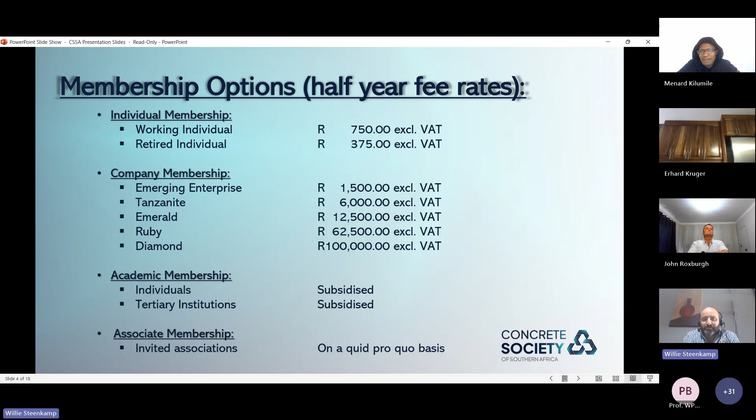Sorry guys, I just can't get my... I just can't get it to forward. Oh, there we go. Okay, cool.

All right, so I just want to start by saying this is a very low-level presentation on concrete rheology. At the end of this, the few slides I've put together, I just want you to have a feel for concrete rheology, and I want you to start linking the tests we do on fresh concrete with the rheological parameters in concrete rheology.

I've based this presentation on a chapter in this book called Advanced Concrete Technology. It's a chapter written by Dr. Peter Domone, and it gives a lovely walkthrough of our consideration of concrete rheology, considering the single point tests that we do on concrete, then a quick and brief description of the concrete rheology curve, and then we'll talk a little bit about the machinery or apparatuses that measure concrete rheology. Let's hope this works now.

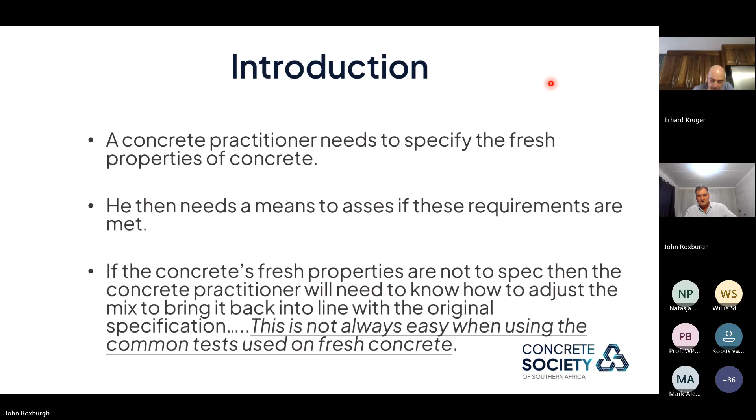Sorry guys, I'm having endless problems with this. Okay, I'll just use the enter key to get it to go forward.

So some of the basic requirements of fresh concrete: we must be able to place and compact it easily. So normal conventional concrete, we don't want to flow - that's a thing we really want to avoid. Using a poker vibrator to flow the concrete is a no-no, you get segregation. So we want it to just be able to flow a little bit around the reinforcement into the corners of the shutters, and hold together while it's doing that.

It must remain homogeneous with little segregation, and included in that segregation, it mustn't bleed too much. In some cases we do want it to bleed a little bit - for example, in an industrial floor, you want it to bleed a little bit. So when we're placing, transporting and compacting it, we don't want that mix to fall apart. We've got to design that into the fresh properties of concrete.

And then, of course, we want a good off-shutter finish, and we must be able to work the surface - for example, in industrial floors, work the surface easily and get the right finish on the floor.

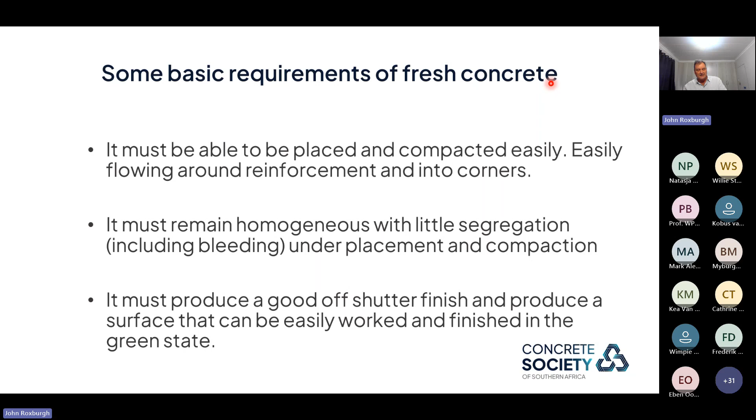And then this is when the contractors have a heart attack, because once the concrete is mixed, we've got a very, very short time to get that concrete transported, placed, compacted and finished off. Its fresh properties are constantly changing from the time it's mixed. People don't understand that the second you add water to your concrete mix, the second the water touches the cement, it actually starts hydrating. Then the rheological properties of that concrete, the fresh properties, start changing because of that. It starts very slowly in the beginning, but it is actually hydrating.

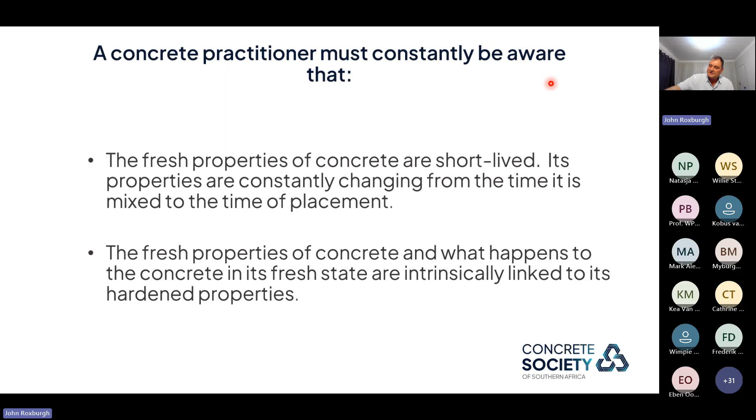It's very important to understand that what we do to the concrete in the fresh state is very closely linked to how well the concrete's going to turn out, how strong it's going to be, how durable it's going to be, and how well it's finished. So it's a very important part of concrete technology, the fresh state of concrete.

There was this guy, Professor G.H. Tattersall. He's renowned as the pioneer in concrete rheology. He wrote a very good book that used to be in the Institute's library, called Workability and Quality Control of Concrete. He was also instrumental in designing what I'll describe later as the Tattersall two-point testing apparatus.

So he proposed 3 different workability classes. Class 1, qualitative, where we just describe the mix using words. Class 2, a quantitative empirical class, which is the common test we do on fresh concrete.

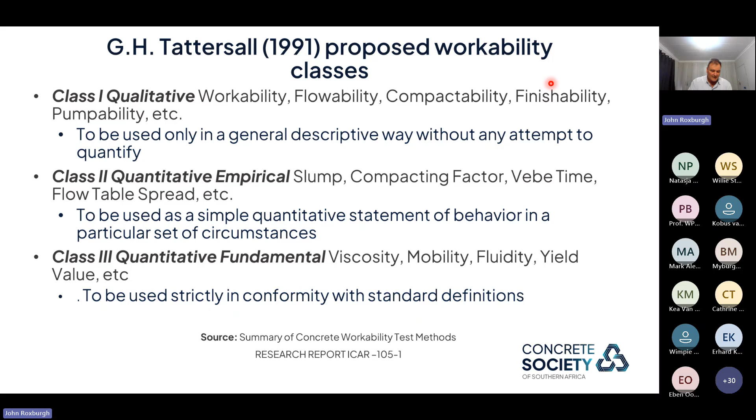We do a test and we get a value for it. For example, slump, we get millimeters, Vebe time, we get seconds. The third class is quantitative fundamental, which describes the concrete in terms of rheology, using the standard definitions you'd find in national standards for rheology.

The class 1 qualitative is basically the eyeball method. So the person observing the mix decides if it's suitable using his eyeballs and his brains.

The eyeball mix design is often used in the mix design process. In fact, my experience is a lot of the laboratories around the country don't do any fancy mix design process. They use what we call an eyeball mix design process. Through experience, they put the constituents together. They roughly know how much of each material needs to be put in, and then they use their eyes and brains to decide if it's workable enough, if it's flowable enough, etc.

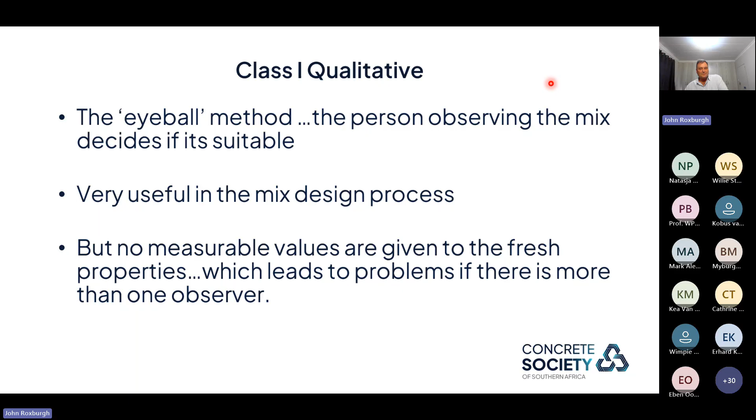But no measurable values are given to the fresh properties. So let's say you've mixed your concrete at the ready mix plant, and the guy looks at it and says, 'Yeah, no, that's great, it's got the right workability.' When it arrives on site, there's a second observer. That observer has to have the same meeting of minds as the guy at the ready mix plant, and rarely will you get that. So there's a problem with that—there's no measurable way of saying if it's right or not.

Whereas with the class 2 quantitative empirical description, simple tests are done on the fresh concrete and they yield a single quantitative empirical value. So we refer to these as single point tests—you get one value coming out of these tests. There are about, I think the last time I counted, about 33 different tests you can do on fresh concrete to give an indication of the workability.

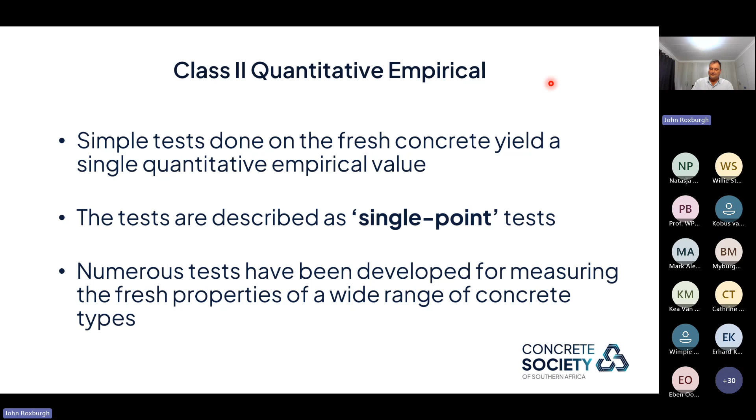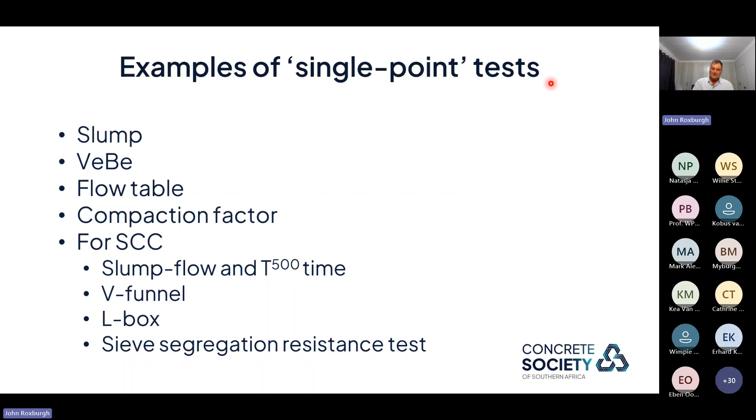So what we'll do is go through a few of them and have a look at what they're measuring. There's a list of some of the tests, so I'll go through some of the more common ones and we can see what they do.

The one that we all know is the slump test. In that diagram, it gives a lovely convex shape of the slump—that looks like a true slump, and that's what a slump should look like when you do a slump test. Unfortunately, when we do slump tests, we often see that half the concrete is sheared away or there's a total collapse, and we still measure the slump, which is not really the right thing to do.

The slump test is a wonderful thing. It's not going to measure workability, but it gives you an idea, and it's universally used, with very simple equipment to carry around. Most of our concrete is specified to have a certain slump, so when it arrives on site, they can do a slump test and send back the concrete if it's not correct.

Some of the problems with the slump test are very, very low precision of results. In other words, it's both inaccurate, but also repeating the test gives you very different results all the time. So it's very operator sensitive as well. We've learned how to work with it, but it's not the most accurate and precise way of measuring.

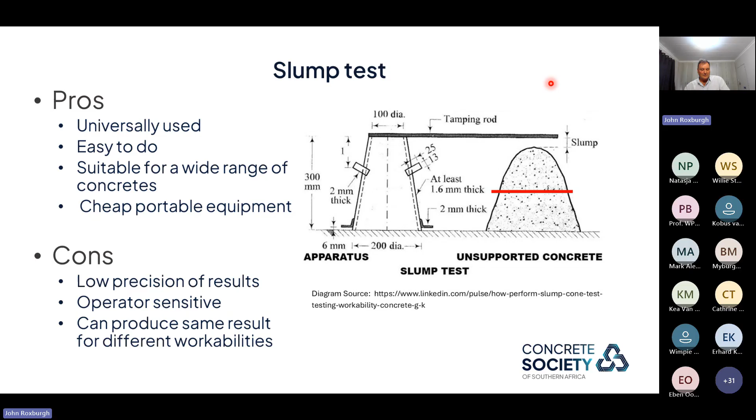What's really happening, in rheology we're going to be talking about the yield stress and the plastic viscosity. So what's really happening is the concrete slumps down, and as it slumps down, that cross-sectional plane gets bigger and bigger. So the stress gets lower and lower, until a point where the concrete can hold its position and stop flowing. You'll see later that slump is really giving a measure of the concrete's yield stress, and you'll link that later when we talk about the actual rheology of concrete.

Here it's from the SANS document - it might have changed, I just found this. But just looking at the tolerances allowed in the SANS document for ready-mix concrete, you can see there's a wide range. For example, for the 50 to 100 millimeter slump, you've got plus minus 25. For over 100 millimeter slump, you've got plus minus 40 millimeters you're allowed. So it's not, how can I say, it's not so precise.

And you'll see that with measuring more accurately with a rheometer, you'll get a much more precise way of looking at concrete.

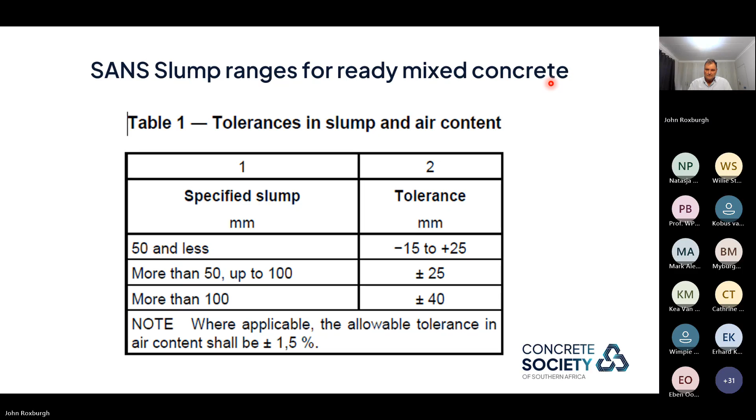Here's the Vebe time. Basically what happens is you do a slump test within a cylinder - I think most of you know this anyway. Then there's a vibration table and you vibrate that concrete down. You put this disc on top of the concrete and vibrate it down until it's horizontal. So it measures very low slump or no slump. It gives a measure for no slump or very low slump concrete. The equipment is not so big, so it's ideal for a site lab. It only can be used for very low or no slump mixes.

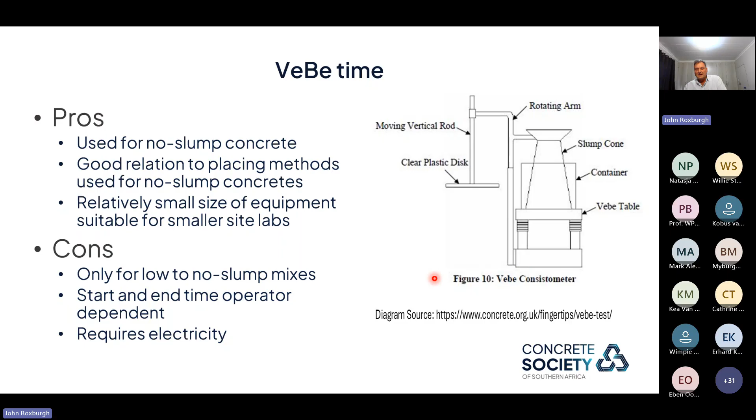One of the problems is that you need a stopwatch and you need somebody to time. So from the time the vibration table goes on to the time it levels out in that cylinder, he takes the time. So I think there's quite a bit of inaccuracy built into that. I mean, if I was doing it, my reaction time probably isn't as quick as a youngster, so you get a bit of inaccuracy there.

All right, the flow table test. This, I think, should be used more often. I've never once seen it used on site. Hopefully people are using it.

I remember there was - I don't really want to tell you the site it was on - but the Italian contractor on the site insisted on having a concrete with a slump of 200 millimeters. Now, that is to do a slump test with a concrete with 200 millimeter slump - it's the wrong test. They should have been using this flow table test. It would have given a much better, more accurate reading.

There are certain problems - the cone is a little bit shorter, and you do basically a slump test in that cone, then use this handle to lift it up to a point where it stops, and you drop it 15 times. Now if the operator lifts this handle up vigorously and bangs into this stop, you're going to skew the results. So there are certain problems - it is operator sensitive, but for high slump concretes it's probably the better system to use, and you need to put it on a very level surface.

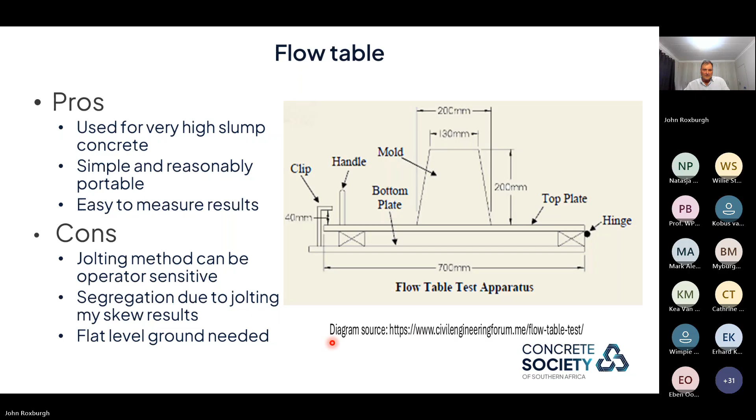All right, let's go to the next one - compaction factor. There was one lying around in the lab. Never ever seen this thing used, but it gives an idea of how easily the concrete compacts.

Basically, you put the sample in the top cone. There's a trapdoor that lets it fall to the next cone, and then you open that trapdoor and it falls into the cylinder. Then you need a scale, because you measure the mass of the semi-compacted concrete in the cylinder, and then you fill that cylinder up and fully compact it. The ratio of the semi-compacted to the fully compacted mass of the cylinder is the compaction factor. Not easy, never seen it used, but it does give a good measurement.

It allows you to apply a set amount of work to the actual concrete.

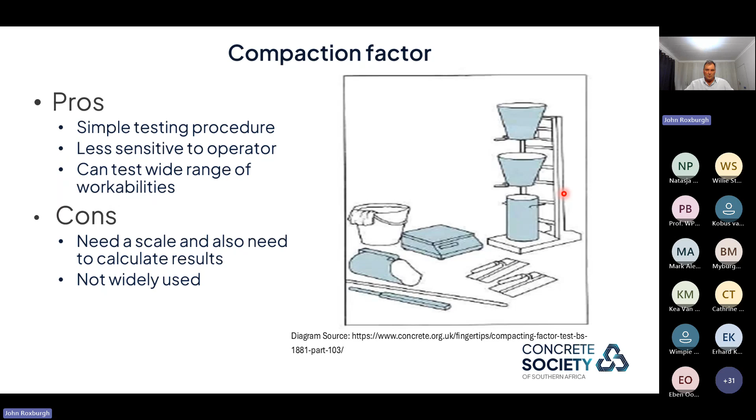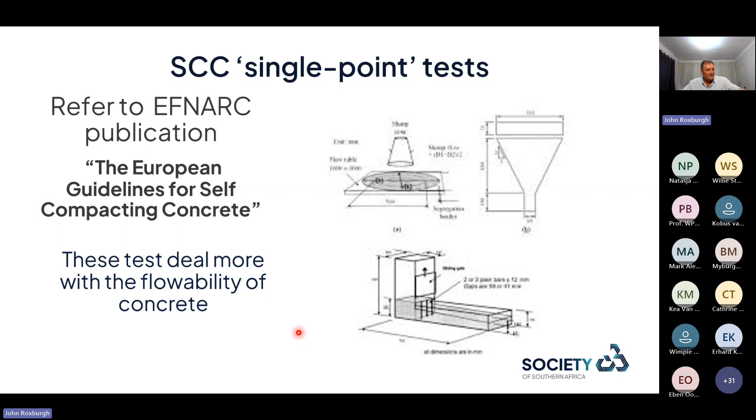Then you get all the self-compacting concrete tests. If you ever want to look up and find out about self-compacting concrete, there's an excellent publication put out by EFNARC, called the European Guidelines for Self-Compacting Concrete. You can Google it and download it. It's one of the best publications, and it gives you all the different tests you can do on self-compacting concrete. You'll notice that with these tests, because self-compacting concrete flows easily, they deal more with plastic viscosity rather than yield stress, especially the V-funnel test. You measure the time it takes for the concrete to flow out of this, and it gives you a much better idea of the actual viscosity of the concrete.

So the question is, are single point tests giving you the full picture? I'm going to put up a couple of slides to show you that between the different tests, you can't correlate easily.

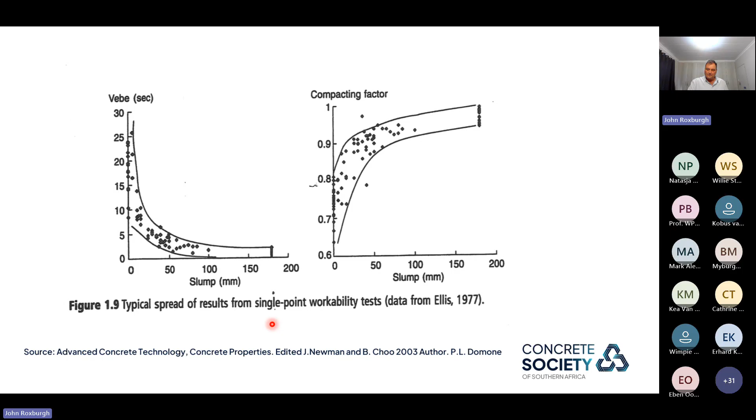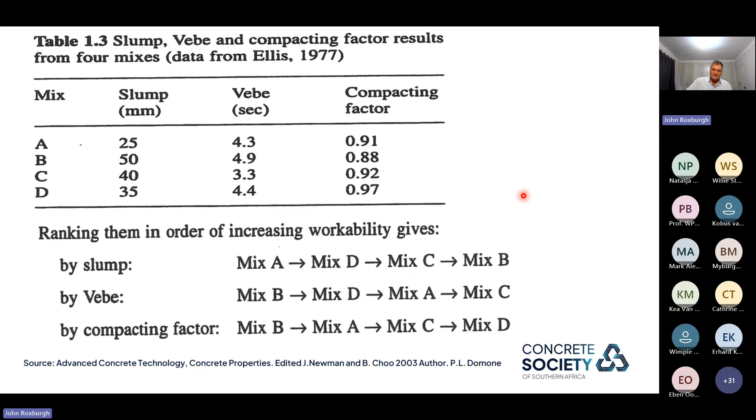Because of that, considering the limitations of Class 2 single point workability tests, the common tests we do on concrete, there's a strong argument to move to Tattersall's proposed Class 3 workability testing, where testing is done in terms of concrete rheology. It's a strong argument, but not easy because of the machinery required. I'm hoping somebody watching might consider taking this up and doing more research, because there is potential for this to be used effectively in ready mix plants, pre-cast operations, and even on site.

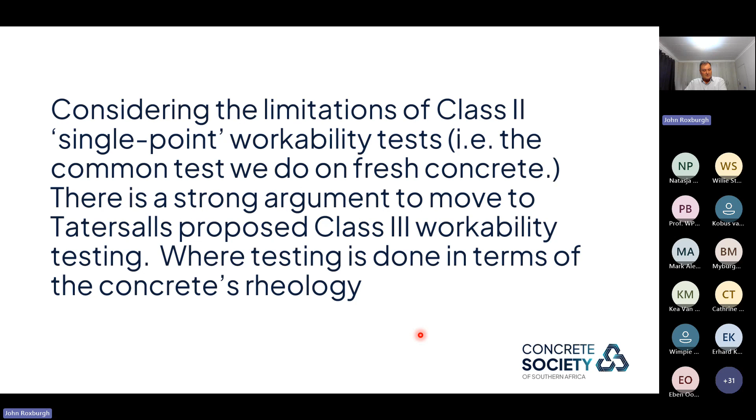I did a Google AI definition of rheology, and since it's from AI, it must be correct. But anyway, I just put in bold the points I want to read out.

Rheology is the science that studies the flow and deformation of materials, examining how substances respond to applied forces or stresses. By understanding these properties, scientists and engineers can optimize material processing, ensure product quality, and develop innovative materials across various industries. I'll bring that up in a slide later, but there is potential to make good use of concrete rheology.

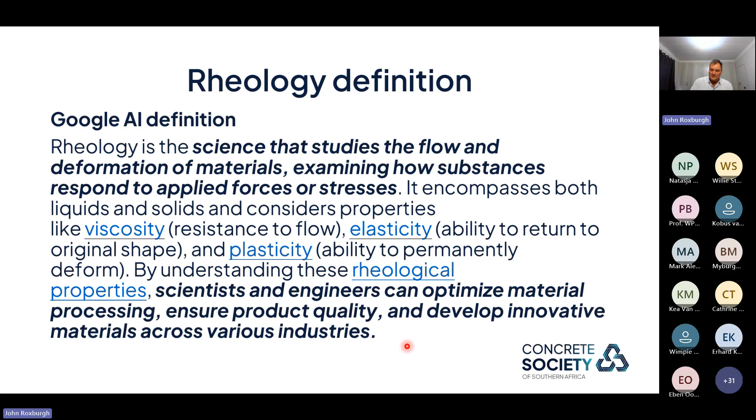So a very low-level definition of how we describe, in rheological terms, a matter that's flowing. Consider a section of a flowable matter, such as water, defined like this: if you've got a force across a cross-sectional area, consider it divided into different plates. A force across a cross-sectional area gives what we call a shear stress, and that causes a deformation, which is the X. We define the shear strain as that X over the base height over which the deformation has occurred. Taking the derivative of that against time gives gamma dot, the rate of change of shear strain. So we can draw a curve of a material using shear stress, which is the load over the cross-sectional area, against the rate of change of shear strain.

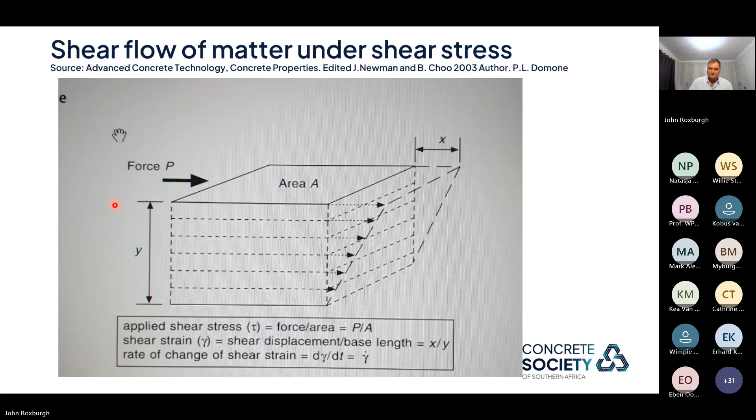By plotting the shear stress against the rate of shear strain, a flow curve can be drawn. A simple form of flow curve can be demonstrated by plotting a flow curve for water.

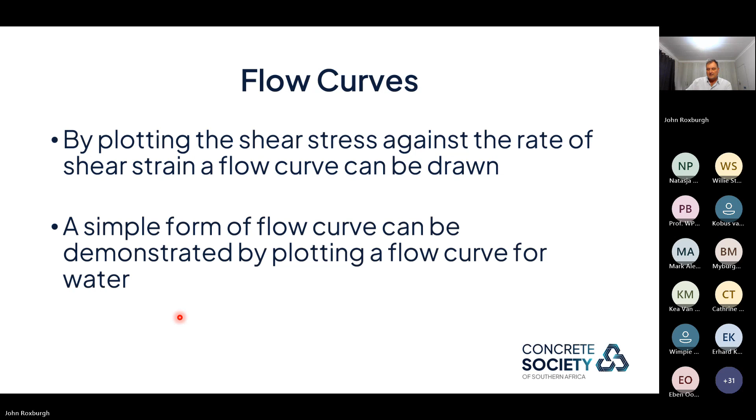When I drew this, I didn't quite get the angle right, it should be closer to 45 degrees for water. But if we plot it for water, we find that the line, the graph, goes through the origin. Then the slope of that graph is what we call the coefficient of viscosity.

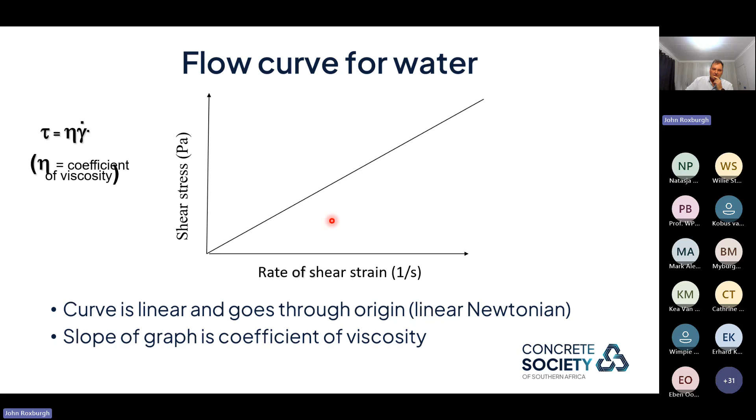You'll see later that concrete's not quite like that. It's what we call a Bingham material, but I'll describe that later. The units of viscosity are given in Pascal seconds.

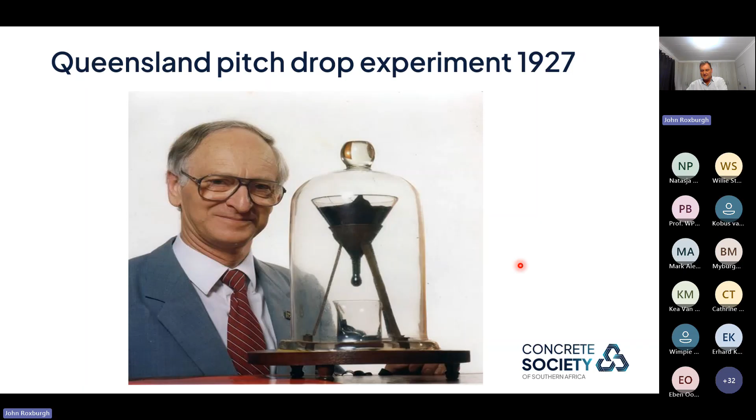Typically it used to drop one drop of pitch every nine years. It's dropped nine drops altogether. They changed things in 1988, they put air conditioning in the lab, and now it drops every 13 to 14 years. Nobody has actually seen that pitch drop. But I just wanted to show you a very, very highly viscous material. It's almost, I think, 35 billion times higher viscosity than water.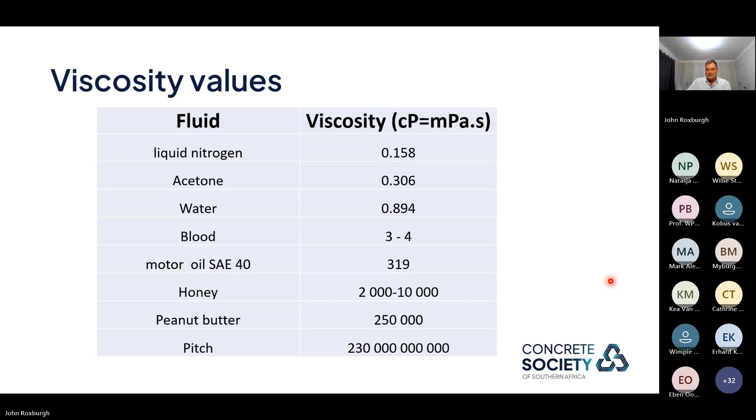Some materials, such as concrete, will only start flowing after an applied shear stress reaches a threshold value. You saw with the slump test, it slumps down to a point where that cross-sectional area gets big enough, and then it stops flowing. It has to overcome that stress threshold to start flowing, and this value we know as yield stress.

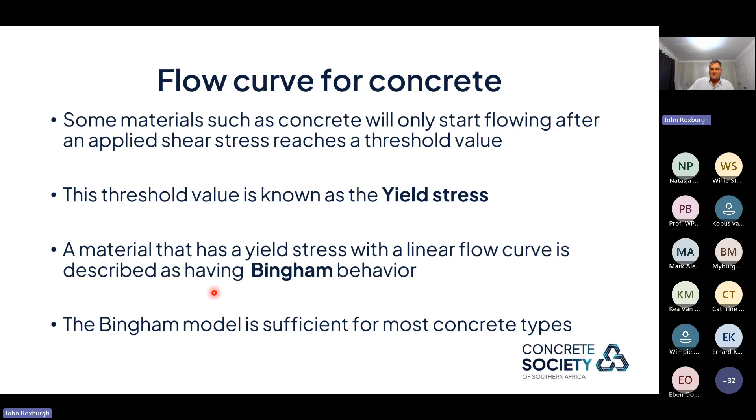A material that has yield stress with a linear flow curve is described as having Bingham behavior, that's the way we describe it. The Bingham model is sufficient for most concrete types. There's an example of a flow curve for concrete, and tau 0 is the yield stress. For most purposes it's a straight line.

Some materials show what we call shear thinning, so the curve goes up steeply and then thins out. And shear thickening starts off shallow and then steepens up, that's called shear thickening. But for most purposes, we can consider concrete like a straight line.

Most concretes require overcoming a yield stress before they will start flowing, and one of the ways we can overcome yield stress is using poker vibration. Then, of course, the slope of the graph is what we call the plastic viscosity, and you can see the equation is basically a straight line equation, with mu being the plastic viscosity.

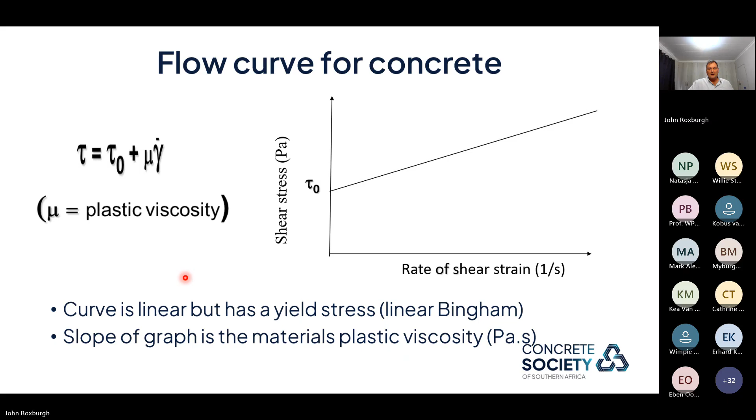So here are different flow curves for different types of concrete. It's sort of imaginary, I just made it up, but you can see for the red line here, conventional normal concrete, and sprayed concrete, like shotcrete, this green line here. You want to be able to spray it onto a wall, and then you don't want it to flow off the wall, so it must have a high yield stress. They do that with some kinds of paint - you apply a stress to it, and it becomes liquid, and you can paint it on the wall. But then it's got a very high yield stress, so it doesn't flow off the wall.

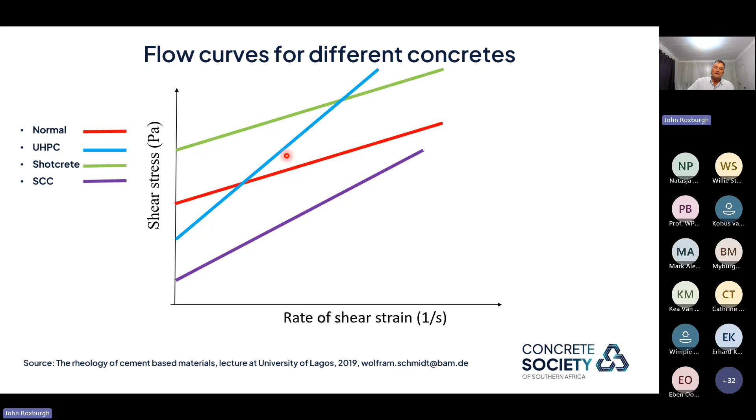Look at the self-compacting concrete. Often self-compacting concrete has got quite a high viscosity - that's the slope of the curve there. But the plasticizers and super plasticizers drop the yield stress right down so that they flow immediately. They might flow slowly, but they flow easily. Ultra high performance concrete, the blue line, often because of the high amount of binder in it, has quite a high viscosity, the slope of the graph.

All right, so here is an example of where we compare the yield stress to the plastic viscosity. This is where knowing the two points, the two-point testing of concrete - in other words, the yield stress and the plastic viscosity - gives us a much better insight into what's happening with that concrete. So we know that, for example, more water will reduce the yield stress and the plastic viscosity, whereas less water will increase both of those. Water being the major lubricant in concrete.

And you can see what happens with fly ash and slag. I just want to point out this red line, the less paste and more paste. In the next slide, you'll see that there's a contradiction, so one of these slides is incorrect. I'm not sure which one is, but they're both produced by very good researchers. So I'm not sure which one is correct, but anyway, you can think it through later.

But I just want to give you one scenario. For example, at a ready mix plant, they mix the mix, and then they find that the slump is too high. Now, the initial knee-jerk reaction is they might say there's too much water in the mix, but they might be incorrect - it might be too much plasticizer or super plasticizer in the mix. By being able to do a test on the concrete to see its actual two-point rheological parameters, you'll be able to see what's causing the problem.

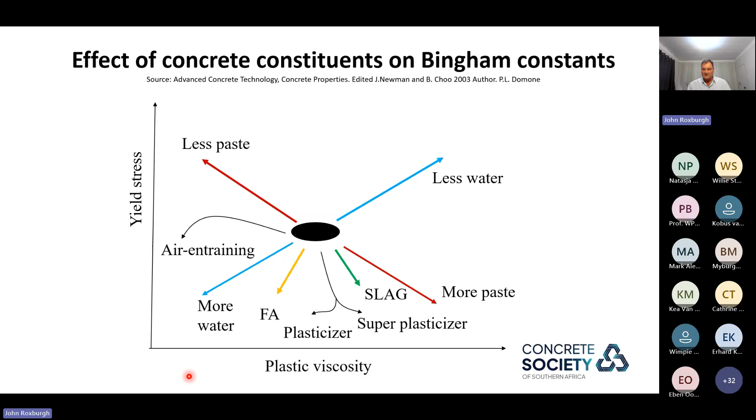You can do this likewise with aggregates. Here's a nice cubic-shaped angular crushed stone. And if you increase the flakiness or elongation of the stone and the rougher surface, you'll find that the yield stress goes up and the plastic viscosity goes up.

Can you see there's a contradiction? Here it says more sand, but the previous slide said less paste. So there's a contradiction there. I cannot describe what went wrong there, but anyway, this I got from a slide from Dr. Wolfram Schmidt, a very respected concrete technology researcher.

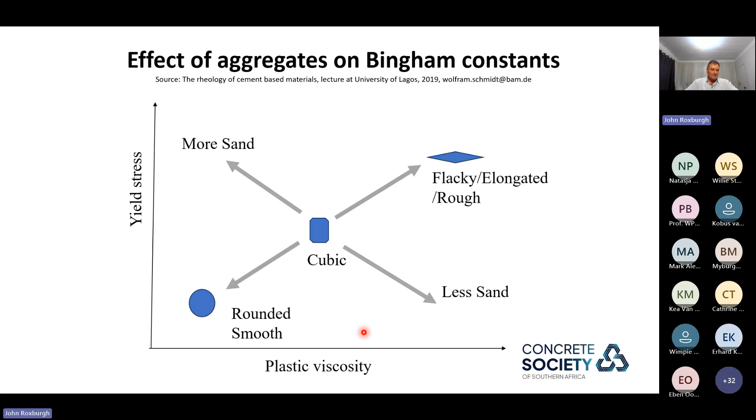So you could use rheology also to see if your aggregate is changing shape. It would be able to point to you whether your aggregate is changing shape, and you could correct it accordingly.

All right, let's talk a little bit about the machines that we can use to measure rheology properties, the requirements. The problem with concrete is it's got stone in it, and that causes all sorts of hassle because the stone is quite a harsh material. So you've got to design a machine or apparatus that can handle enough of the concrete, typically more than 10 liters, and must be able to handle a wide range of concrete types, and be strong enough that it doesn't wear down and break with the stone. So there are three main test systems that have been developed.

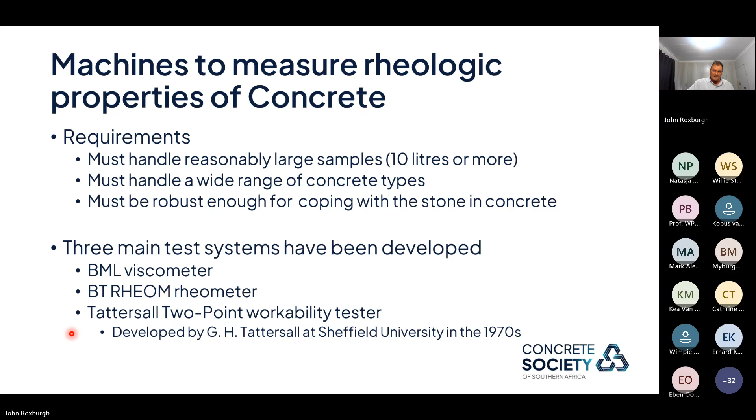I'm not going to describe these two: the BML viscometer, which is basically a solid cylinder within an outer cylinder, and the concrete fills the outer cylinder, and they basically turn relative to each other. The BT rheometer, which is basically you put the concrete between two rotating horizontal discs. And then this apparatus, which they often call the two-point workability tester, pioneered by Professor Tattersall in the 1970s.

So we'll talk a little bit about that. This is where I'm hoping there's somebody out there who wants to do some research on this. There's a Tattersall Mark II machine sitting at UJ. Some of you might have gone to UJ, so you might know this machine. Unfortunately, I've got beautiful pictures of that machine, but I was not allowed to publish them, so I just found this arbitrary looking machine, which looks quite different to the one at UJ.

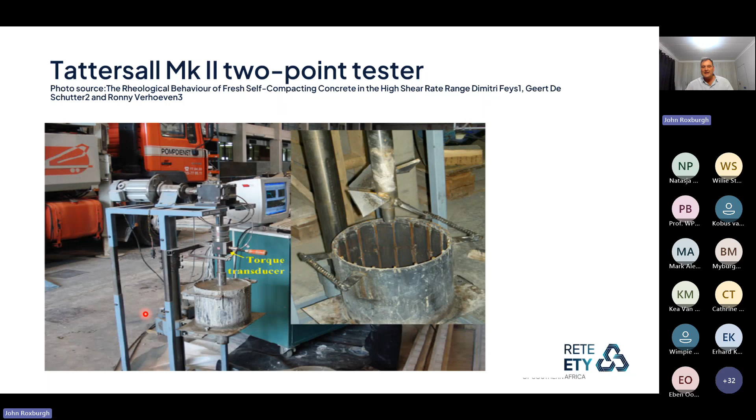But that's what it looks like. It's quite a simple machine, and it's designed basically on a mixer, almost like it's a mixer. This H shape is more for low slump concrete, but the one I'm more interested in for high slump and conventional concretes is the one with the two impellers, or the impeller system. That basically rotates within the concrete, and it can move freely within the concrete, so you don't get any shear planes built up.

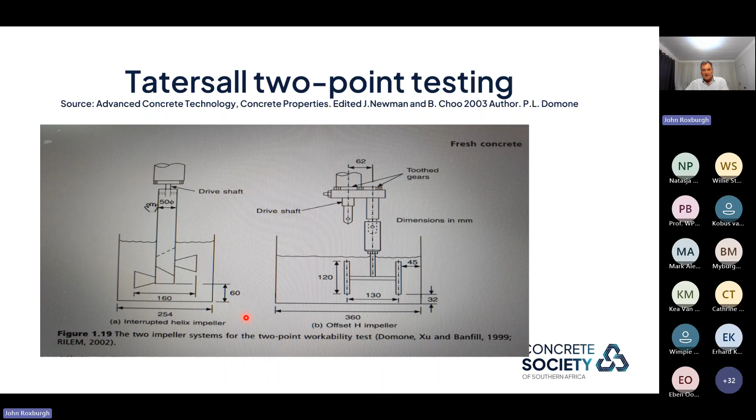And so you can measure the rheological properties of the concrete with that. The output of the device is shown in the equation T, which is the torque and the rotational speed, and then the terms G and H are related to yield stress and plastic viscosity. The device must be calibrated in order to determine yield stress and plastic viscosity in fundamental units.

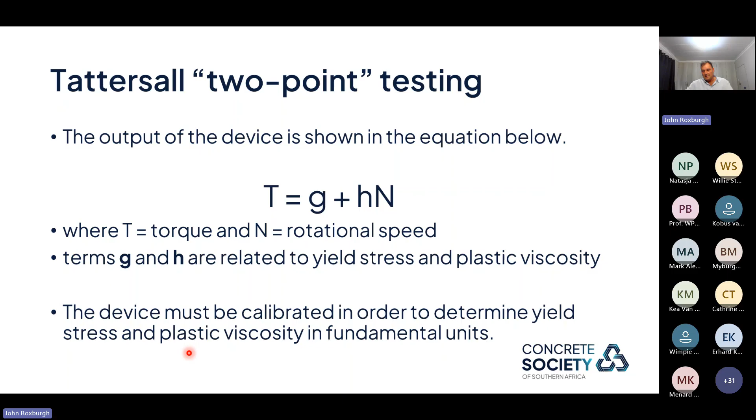This is great if you really want to know the actual plastic viscosity, but what I'm proposing here is that it would be great if somebody could take that simple machine and make a standard machine out of it, like a slump cone, where you just measure millimeters. If you make a simple machine that just measures pressure or torque, giving two values that you can relate to the actual yield stress and plastic viscosity, that would be great, and you'd get some pretty nice results and control over your concrete by knowing that.

So the advantage of this apparatus: it can test a wide range of concretes from very low slump to very high slumps. Two-point testing describes the concrete in rheological terms, and there's the option to change impeller design to suit different concretes. You can always change the impeller setup to suit different concretes. For example, a precast and ready-mix concrete operation could make very good use of these.

Instead of doing the slump test, in fact, most precast and ready mix plants don't even do a slump test. They do an eyeball test. The guy looks down into the back of the truck or the mixer, and he decides for himself what the slump is. They get pretty accurate at that. You guys that work in these plants, you get pretty accurate at deciding what the slump is.

But wouldn't it be nice to be able to take a sample and actually put it through one of these apparatuses to see that you've got the right rheological properties? Too often I see at precast yards, especially with extruded concrete, they put the concrete and start trying to extrude it, and it doesn't work at all. It just flops down.

At the moment, this apparatus is too bulky and heavy to use on site, but it is suitable for labs, site labs. The one thing I read up is that mixing for too long can segregate the mix. So there we go - it needs to be developed further and simplified.

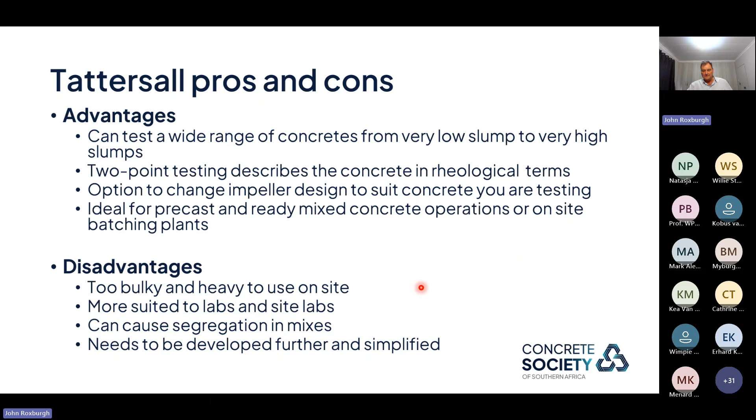So I just want you to think about this. It's all very well having the lovely rheological properties of concrete down to a T and specifying them. But remember, from the time of mixing to final placement, the fresh concrete's rheological properties are constantly changing. So we have to always cater for that. And there are 3 things that make you lose workability. And I can tell you workability is the major cause of loss of durability and strength in concrete, because if you lose workability, you don't get the compaction that you want and the finishes you want.

So the 3 things are loss of water, due to evaporation, absorption into the aggregates, and the hydration of the cement, all made worse by low relative humidities and high temperatures. The hydration of the cement also speeded up by high temperature. And then, of course, admixtures lose their efficacy after a while. They get absorbed onto the surface of the cement, so they only last for a certain amount of time. Then you lose the effect of that. So we've got to be aware of that with concrete in the fresh state.

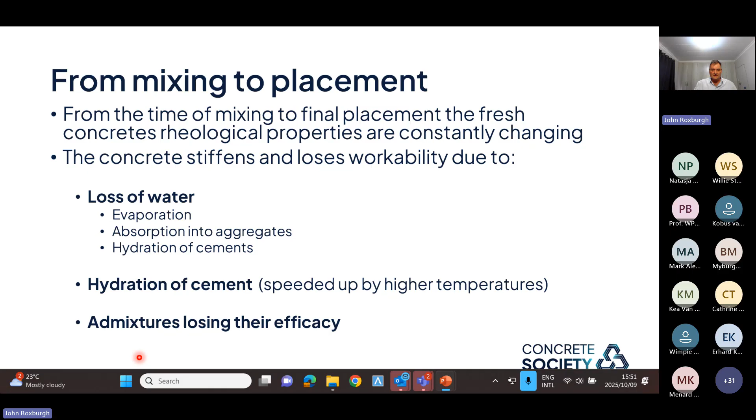Also, we've got to remember that concrete is a thixotropic material. A thixotropic material is like All Gold tomato sauce. If it's allowed to settle for a certain amount of time, there's a certain amount of structural buildup, hydration of cement, and also a certain amount of natural compaction due to the bleed water and everything coming closer. So it tends to stiffen. It's not actually showing its actual rheological properties. That stiffened material has to be worked again to get back to its rheological properties. So just remember that with concrete.

It's very, very evident in self-compacting concrete. You make a batch of self-compacting concrete and you pour it into a wheelbarrow or something like that. You find after a short while it stiffens up, even though behind the scenes it's got the same rheological properties that you require. You just need to mix it up again to get those.

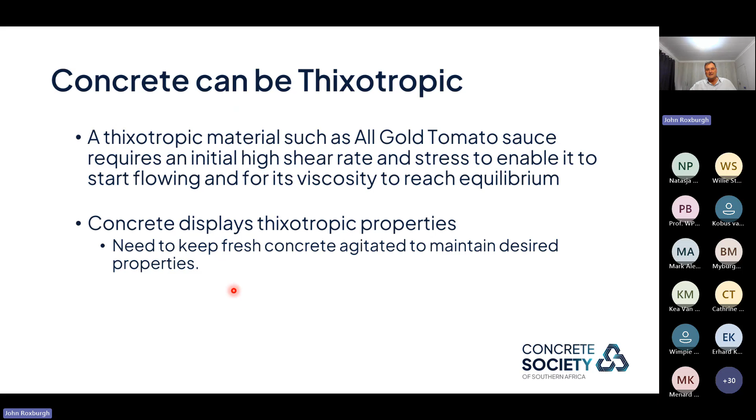Right, so there we go. So there is a need to keep fresh concrete agitated to maintain desired properties.

Right, so ending off, rheology as part of concrete technology is important for, and I got these from Dr. Wolfram Schmidt. Optimizing the use of constituents that make up the concrete. So we're always trying to use cement as efficiently as possible. And by doing this 2-point testing, we've got the potential to do that. And by having a closer control over the concrete, our safety and robustness increases. We meet the specs more often and we get the right strength.

And linked to that also, we get the right durability and we get the right ease of handling and placement and compaction. And then linked to all of these 3 things above is sustainability. If you've got strong, dense, well-compacted concrete designed properly, it's going to be durable and more sustainable. And then, of course, concrete rheology can play a part in innovation. These fancy shapes, slender elements, and then, of course, 3D printing, the concrete ink, relies very heavily on concrete rheology.